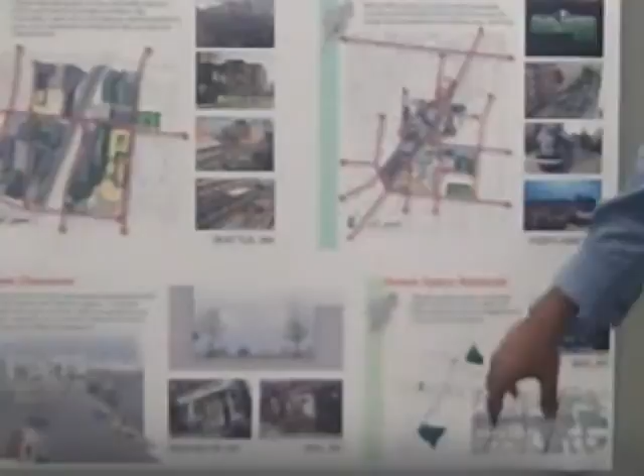We identified as our central point the intersection of Gilbert and McMillan. And these studies, and it's a shame because this is one of the most important parts of our presentation that we're giving very little time to, but these studies over here represent the street character of what we do to the street. So we are considering making McMillan a two-way, not considering, we're proposing that.

And the reason for that is that it's more accessible for cars. I mean, in an ideal world, of course, you'd have people biking and walking all the time with a BMI of 22, but considering where we are, it is important to give a nod to the cars. So here's the revised street section from McMillan.

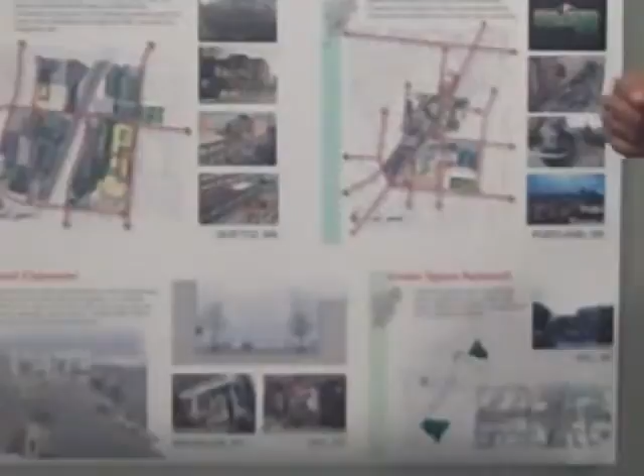We have a 10-foot sidewalk, 8-foot parking, 11-foot lanes, and 3 to 4 foot of the 10-foot sidewalk is a hardscape buffer zone, so that we can potentially have areas for seats, and it also becomes stormwater treatment a little bit because it'll be pervious hardscaping. And this is a rendering down the street of various pocket parks. So this is segueing into our green space network.

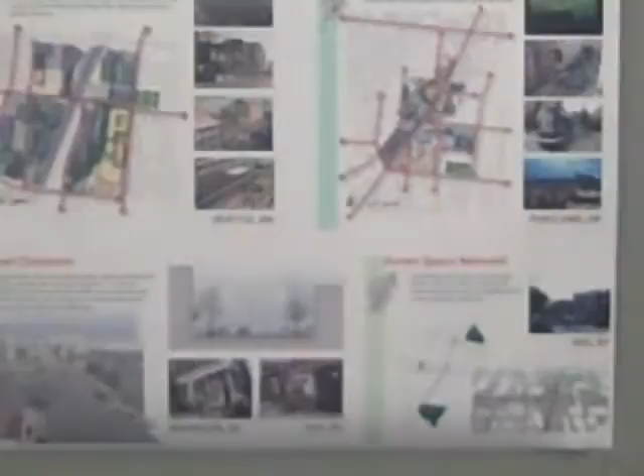Our idea is to have a sawtooth pattern of parks that runs up McMillan and also up Gilbert and also east-west from McMillan. And the reason for that is to create more programmed green spaces, which we realize that our neighborhood is lacking in. And so if you can see the pattern here, they would be interspersed on either side of the street, going up in strategic locations, and that way it creates a space that's more pleasant to walk through.

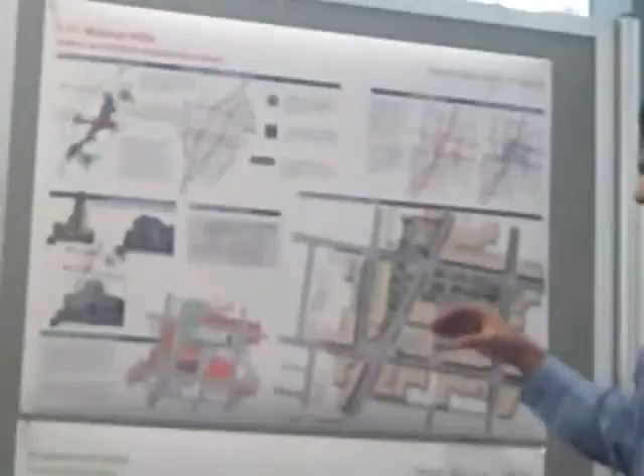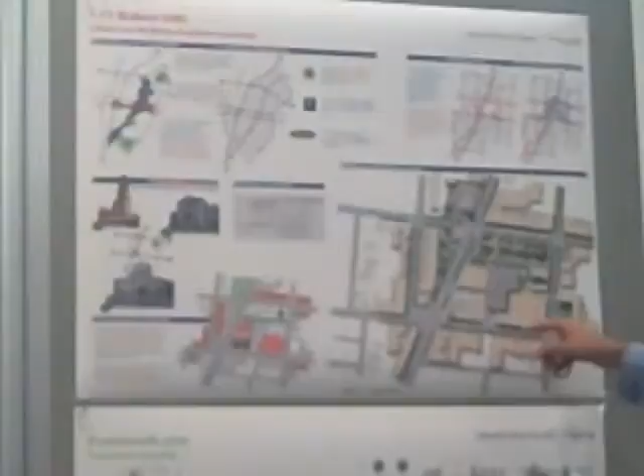And actually that brings right into our group project here, which Gabe and I worked on, and we did a more zoomed in study of that Gilbert-McMillan intersection. So what we've done is we've gone into adjusting the grocery store so that it's still in this corner, but the rest of it we want to make storefront retail. And we've programmed our green spaces.

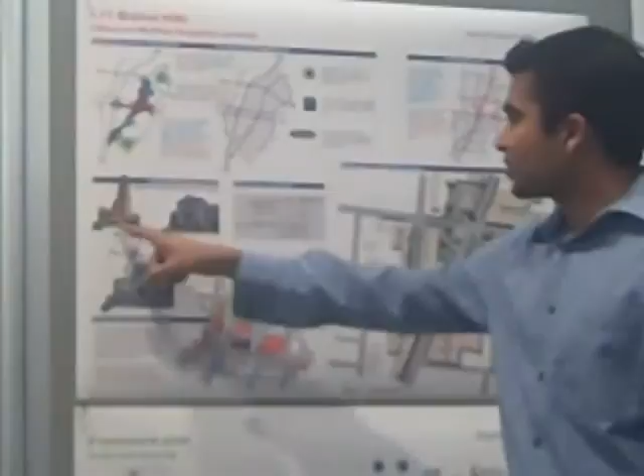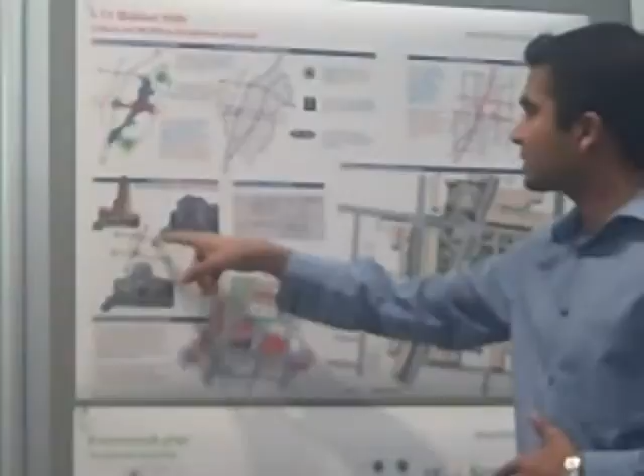The main idea is that we're still keeping a nod to what's existing by kind of framing these historic and culturally relevant buildings. So we have the church tower on this corner with Walnut Hills Public Library and Peebles' Corner. And our strategy for doing that is to create a green space just across the street or in some way that relates to this space directly and also connects to the rest of the other three.

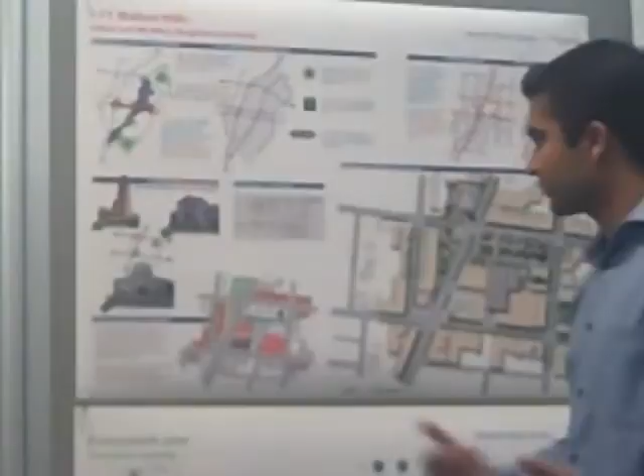We've also taken careful note on how much parking would be required, because again, the cars are so important to this part of the neighborhood. Do you want to talk a little bit more about that? Well, that's the main idea. Just go ahead and point. Why don't you point to those landmarks on the plan?

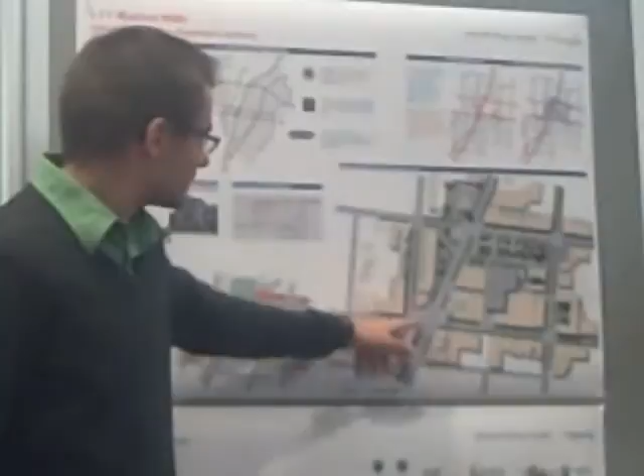The church tower is here. Reclaiming this as a public amenity, open park. And again, programs so there are spaces to meet and sit. The next connects visually to Peebles' Corner, which is right here, and the Paramount Building. And we created a pedestrian access through to the Carnegie Library.

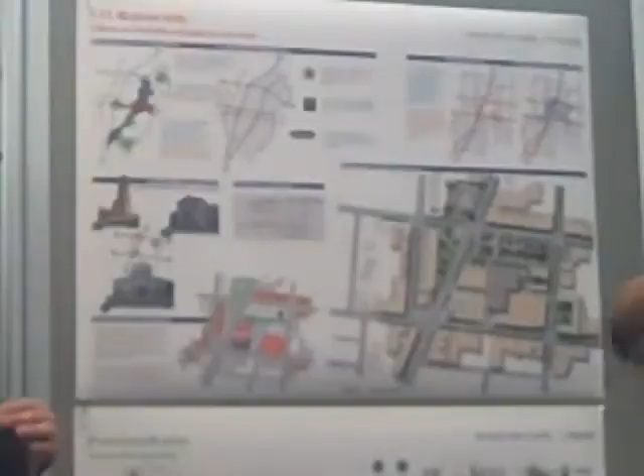And again, the program space here would be a pavilion. There's also a bus stop here, so it starts getting into multi-use there because it could be a bus shelter for people just waiting. And it's also a very visually prominent area of our site.

For my individual assignment, I focused on the I-71 corridor, and not only the corridor along Walnut Hills, but also further up north. And I came with this rather conceptual idea of covering the entire corridor with a park, with a green layer, putting the highway underground, and by doing so, create something that really generates the neighborhoods around it, really generates the city, stimulates the city, the traffic flows and everything that's connected to that.

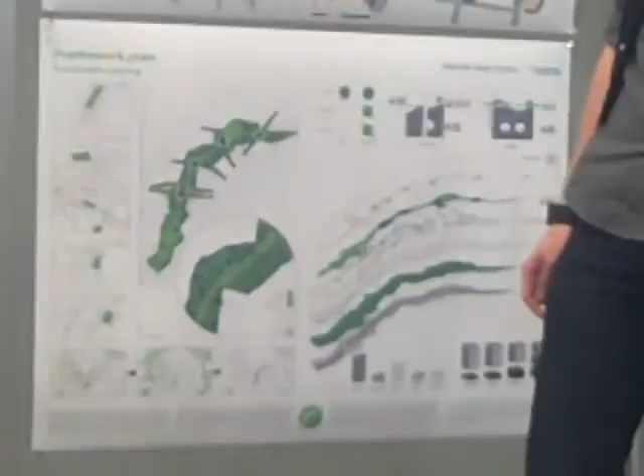And while discussing that with Frank, apparently Cincinnati already had a history of parks like that with these green corridors with the Kessler Plan, which was made in 1907. This is the Kessler Plan. He proposed a series of parks which were pretty much all established and built, but he also proposed a connection in between those parks of green corridors. And it's a shame actually that never was realized.

Well, some of it was realized, but for instance the I-71 corridor, he proposed a green corridor over there with the idea of the Deer Creek that was already present then and the topography of the site. But instead of doing that, a highway was built.

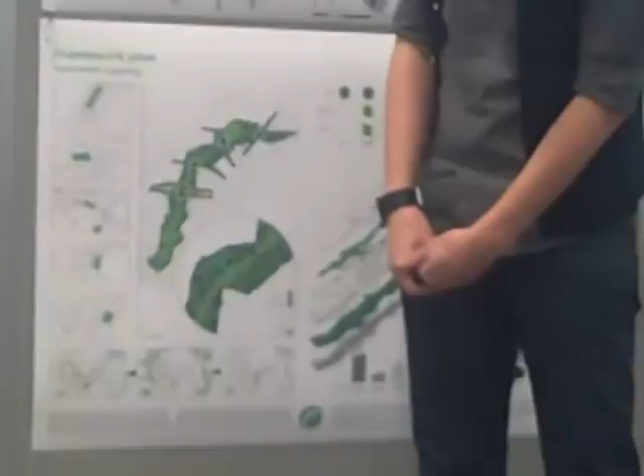Looking to other cities around the world, you see, for instance, Central Park in New York, Hyde Park in London, the Tuileries in Paris, Millennium Park in Chicago, and the Central Park in Brussels, and you see with all of these examples that the park really stimulates the city and generates activity and contributes to living qualities and connection along the park.

So if I look more into it, what I really did was putting the highway underground, really conceptual, saying from here till here, you cannot see the highway anymore, it's underground, you have access above ground to the highway, and then it's just a big tunnel. And above the ground, I designed some sort of edge from building to building, and by doing so, I created this green corridor. The color difference is not so big, but the very big corridor you see here is just a corridor, and then the lighter green is the park, and it goes from building to building.

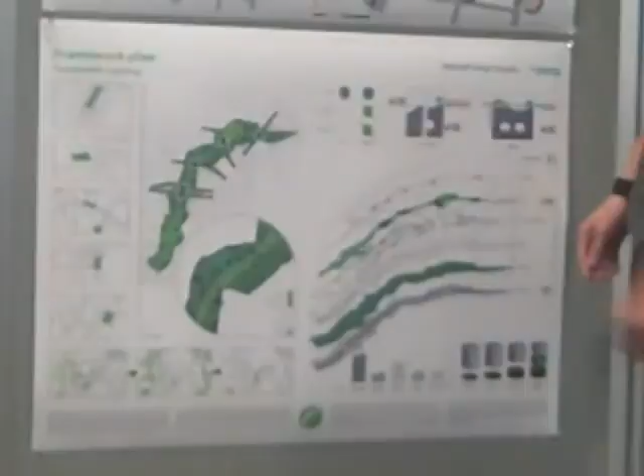And by doing so, I created some sort of new typology for the buildings that all of a sudden got this new facade towards a park, towards this corridor, with also a new system of transit, with a bike lane, with this river that links to the historical meaning of the Deer Creek and everything.

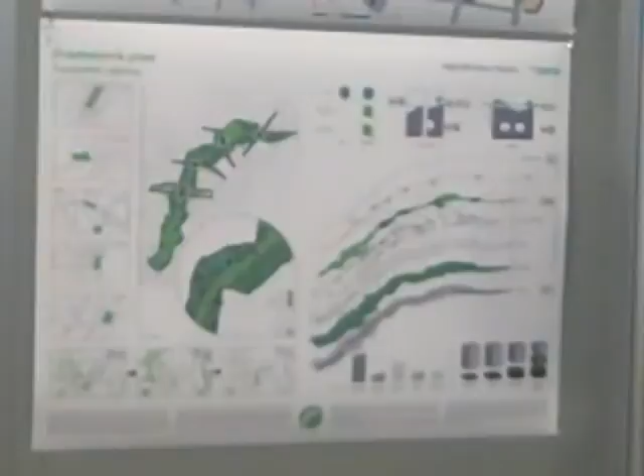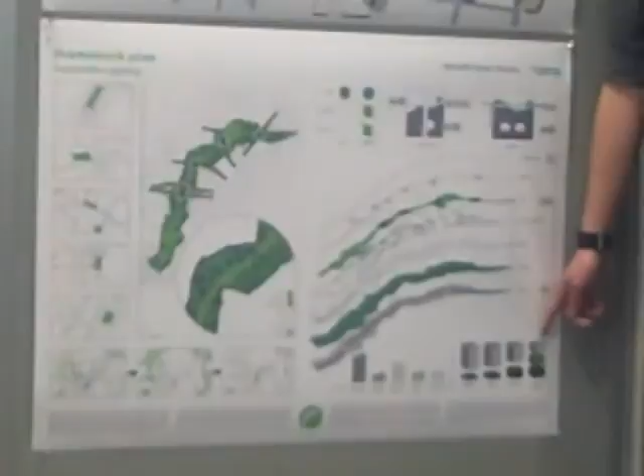My time is up, I feel it, but really quick maybe the figures, because it's rather conceptual and people tend to not look at it if they think that it's not realistic. But if you see that now 1/3 of the space is used for streets or for buildings, and 2/3 of it in this corridor is empty, it maybe justifies this intervention, as 1/3 of this entire corridor could be a park, and this is the 1/3 that you see here.

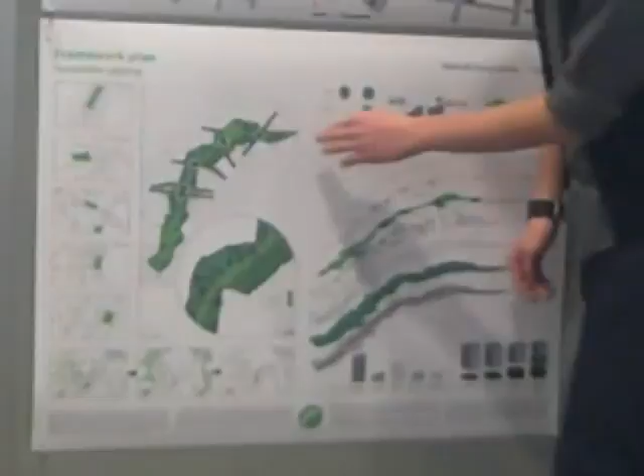It is this park from building to building that generates connectivity along it as well as across it and everything. I'll stop here.